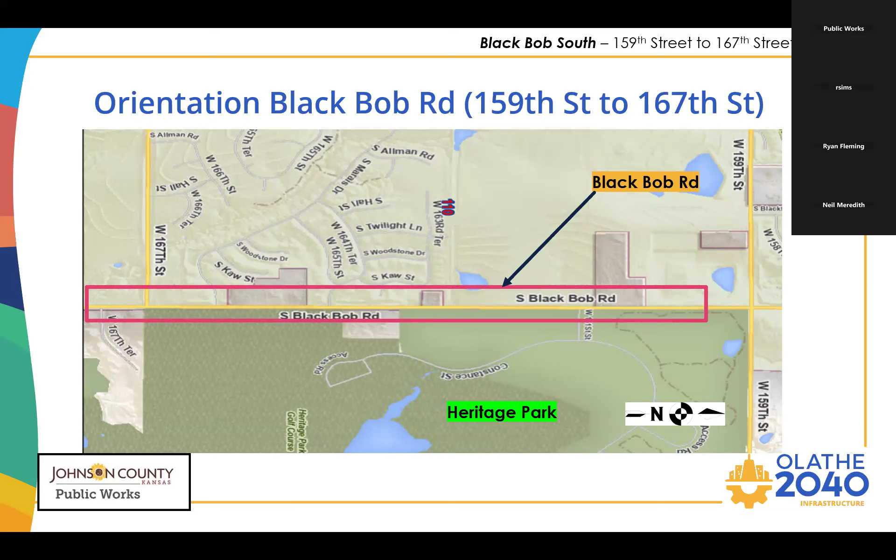This slide shows an overall view of the construction limits of this Black Bob Road improvement project. The limits in the title, 159th Street to 167th Street, are not as descriptive as we would like. However, they are well suited to providing a general location. The next slides will get into the details of the northern and southern limits.

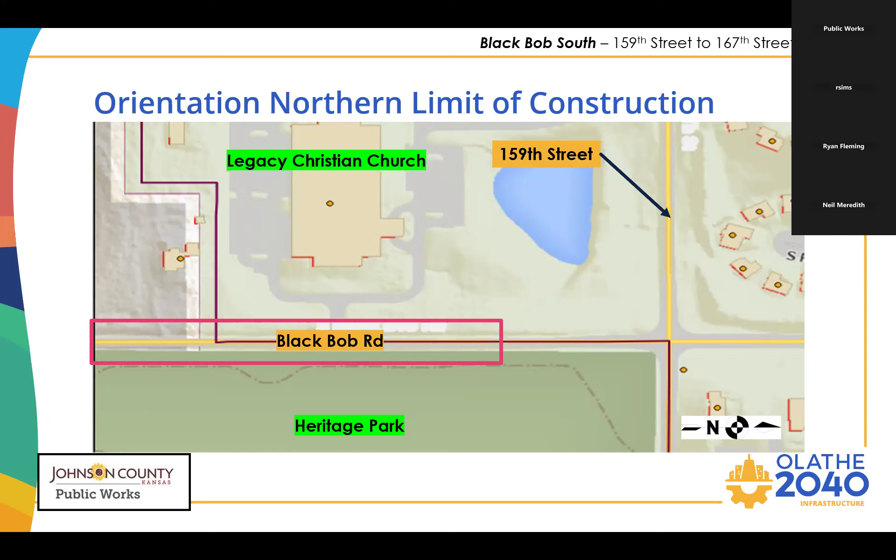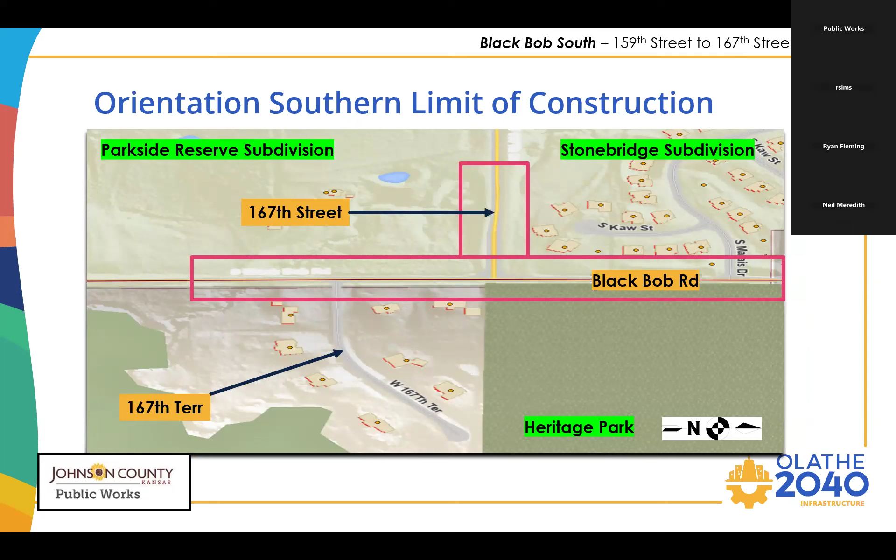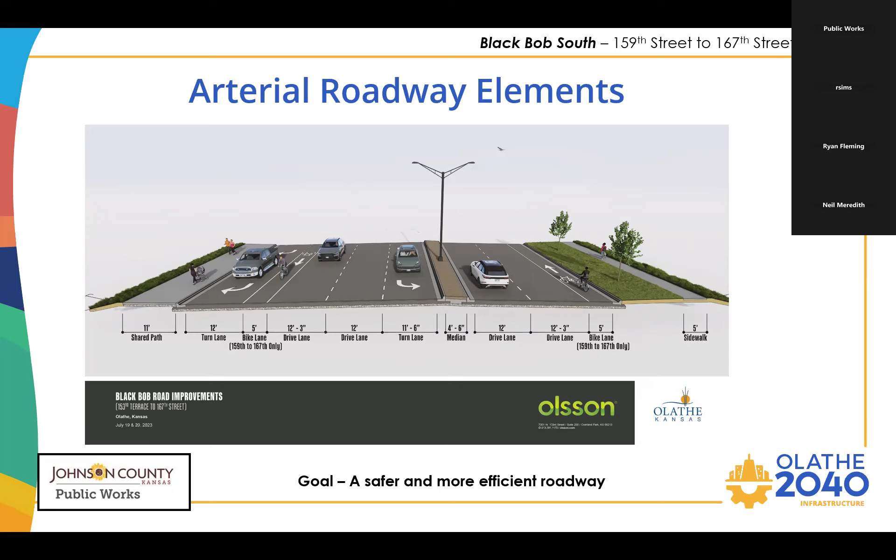This rendering shows the typical section and benefits of the 4-lane divided arterial that Black Bob Road will become at the end of the project. There will be 2 driving lanes on each side of a raised median, complete with new streetlights, bicycle lanes in each direction, sidewalks on both sides of the roadway, and dedicated turn lanes at appropriate intersections. All of these improvements will transform Black Bob Road from a narrow 2-lane road to a safer multimodal transportation facility.

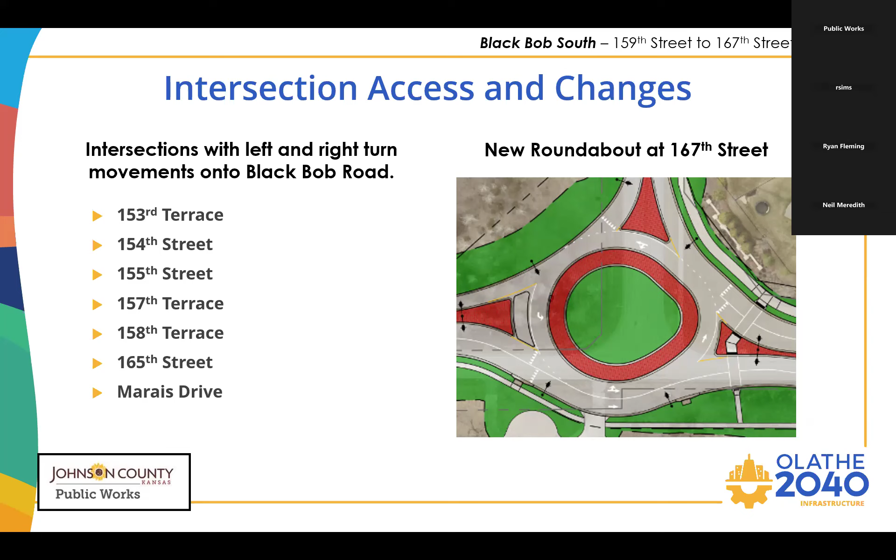A similar pedestrian signal was installed last year at 147th Street and Pflumm Road. Please note that due to federal requirements, the signal cannot be installed until this project is near completion.

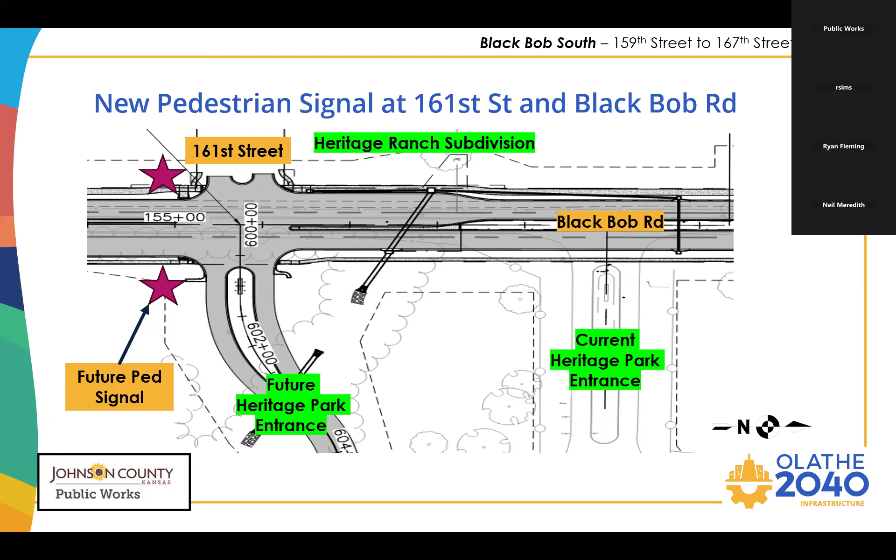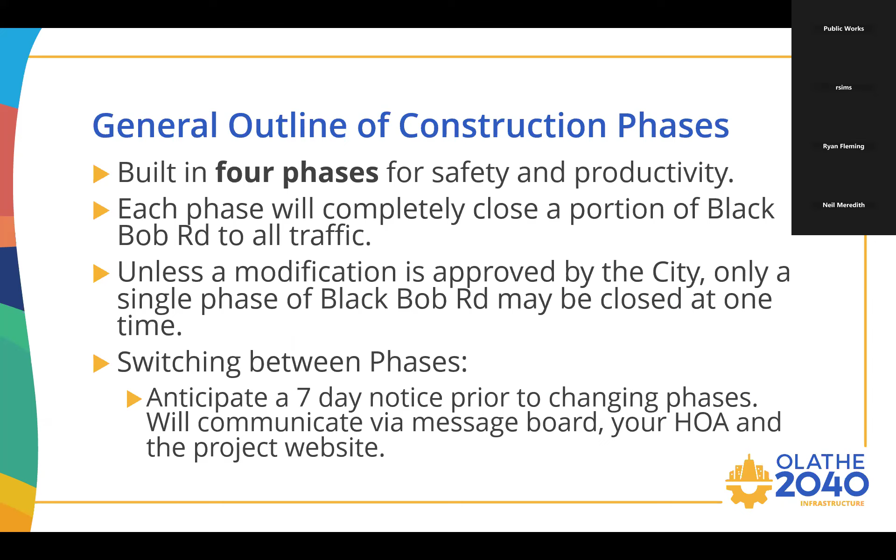Work can occur outside of a phase as long as it doesn't completely close the road. Examples of this type of work include the new water main, earthwork, or the new storm sewer. Most of this work will occur outside the existing roadway. However, there are a few instances when we need to cross the existing road with either the new water main or the new storm sewer.

These street crossings will be installed with flaggers controlling traffic and are done outside of rush hour. You also see lots of small flags and paint along the entire corridor, but that does not mean we are changing phases. It's simply the procedure for marking utilities and is typically done for the entire length of the project.

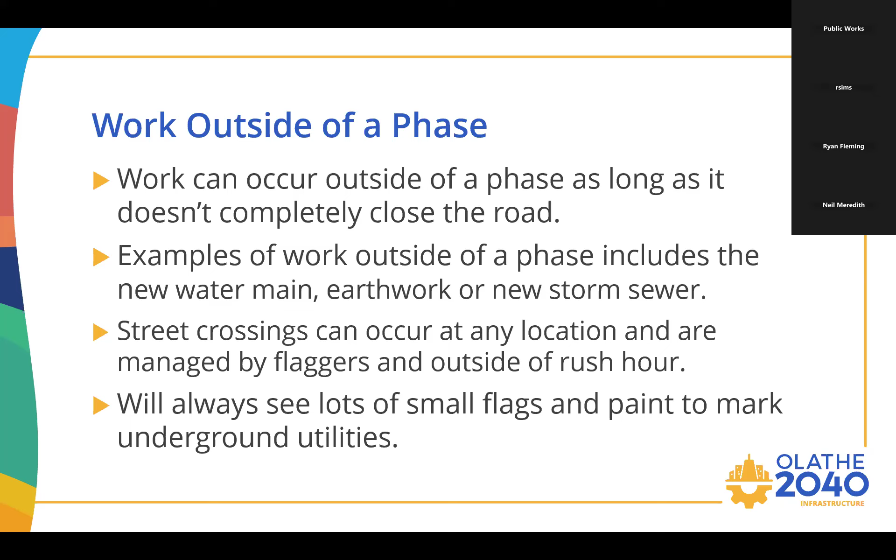So we anticipate starting work before the end of the month, and barring unforeseen circumstances, we anticipate opening the road to traffic by the spring of 2026.

Mur-Len Road is the signed north-south detour route. As phases switch, the route taken to Heritage Park or your subdivision street may change, so please be aware. Speaking of Heritage Park, it will always have access off Black Bob Road.

This is our planned phase 1, estimated to go from March through May. Phase 1 includes placing traffic control, general clearing work, starting the new reinforced concrete box that will carry stormwater underneath Black Bob Road, and associated road work up to 167th Terrace. Work on the new water main should also begin, and this work can be performed in all phases since it is outside of the existing roadway.

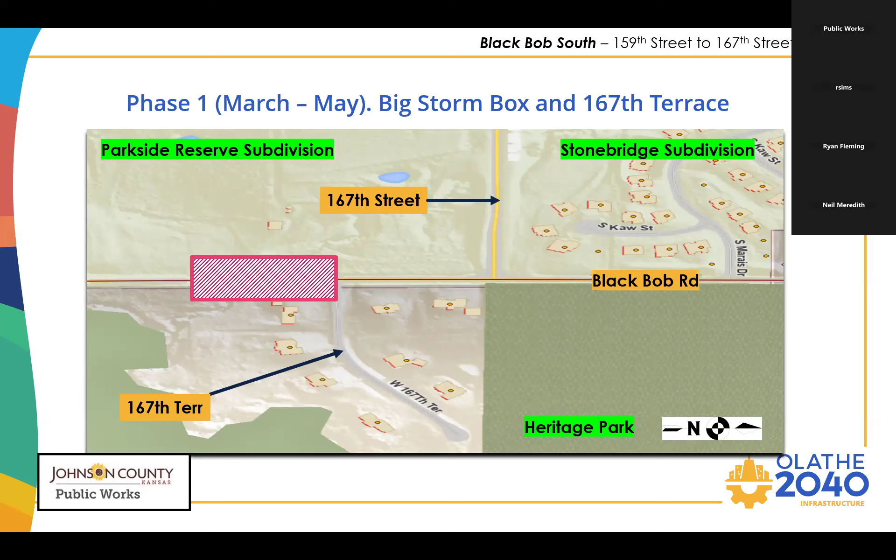Phase 2, estimated to run from May through September. Phase 2 construction will start at 167th Terrace, will include the new roundabout, and ultimately go to 165th Street. There will be no access to Black Bob Road from 167th Street, and residents will either go north or south, depending on where they live.

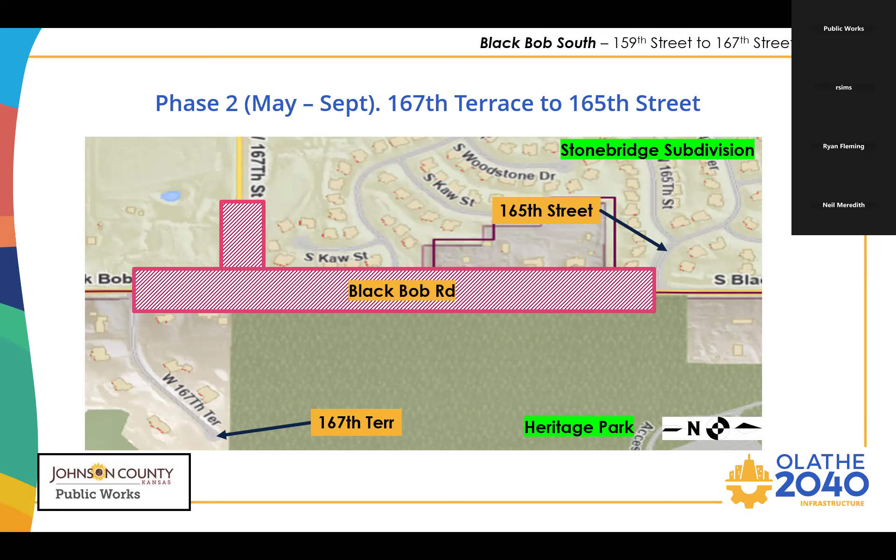Phase 3, September through November. Phase 3 construction starts at 165th Street and includes the new Heritage Park entrance and the connection to 161st Street. The construction stops short of the current park entrance, and access to the park will be from the direction of 159th Street. Please note the locations I've shown for the new park entrance and 161st Street are not exact, and at this future intersection will be the new pedestrian signal.

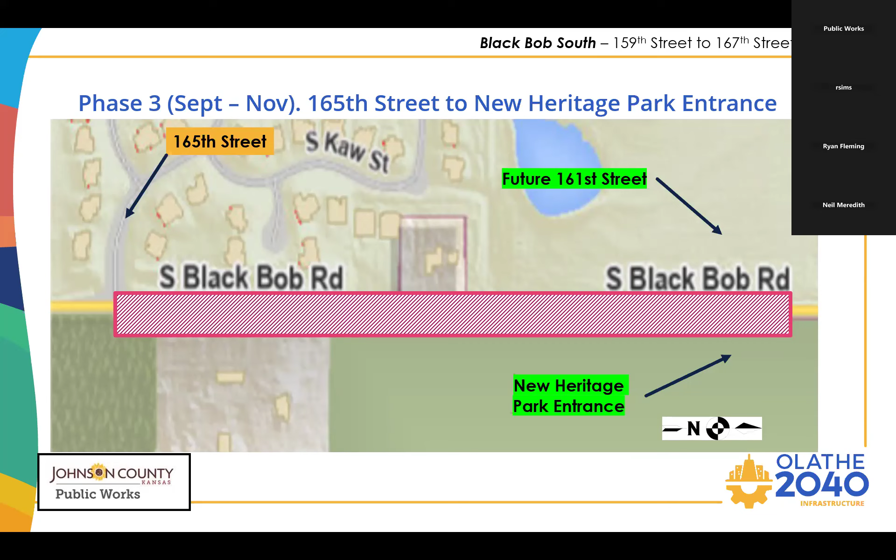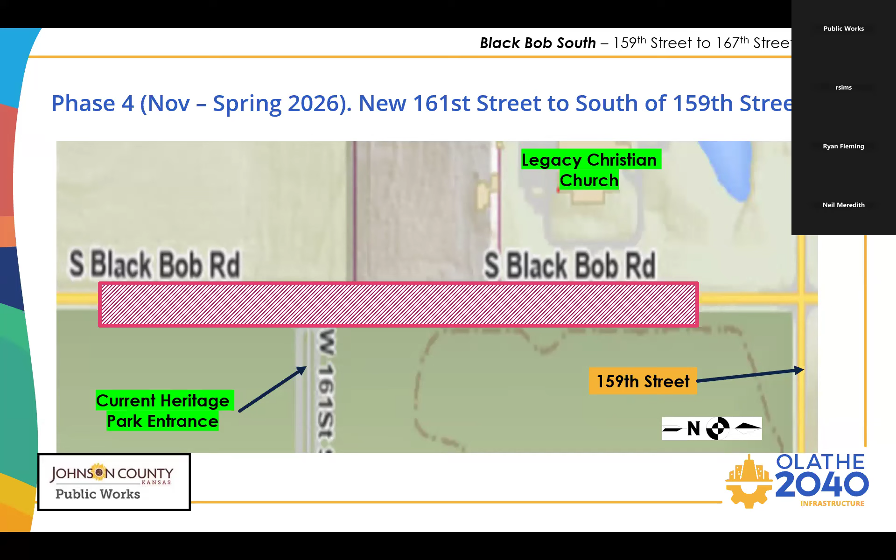Monday through Friday is the typical work week, though work on Saturday can be permitted. The approved work window is 7:30 a.m. to 7:30 p.m., and these limits represent when the contractor is allowed to work. Work outside of these hours are permitted if approved by the city engineer.

Examples of work outside the typical day or hours include tying the new water main into the existing system or finishing asphalt placement for the new road.

There will be a new water main and several new water services installed with the project, and these facilities are owned by Water One. Within about 30 days, Water One will send out a letter with contact information and a request to join a web-based notification system. The notification system will alert you to the planned disruptions. Please contact Water One if you have questions or don't receive a letter within 60 days.

And I'd like to include a brief note about communication lines and electrical service. I can assure you that no disruption to these vital utilities are planned or intended. Many hours have been spent attempting to locate and safely move any underground lines that could be in conflict with the project, though inevitably there might be a line that is unforeseen and gets cut during the course of the work. In the event something does get cut, please contact the service provider, then a member of the project team.